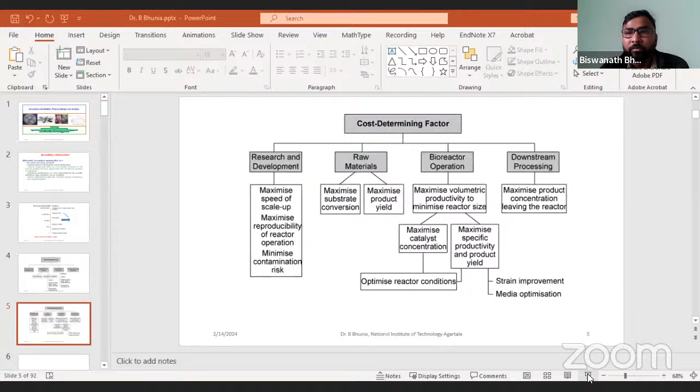So in our previous discussion, before the interruption, we discussed that there are two different aspects: one is downstream processing, another is the biochemical reaction. Downstream processing I already discussed - it is a unit operation not related to any biochemical reaction. But bioreactor operation is very important when you are designing any secondary metabolite process.

Here you need to think about several things - not only how you design a reactor or a process, but how you can improve a strain or optimize the media. As a whole, you have to think about the process. It is not simply batch process, fed-batch process, or what you are adding. It is the whole concern - from reactor design, to strain improvement, to media optimisation - that constitutes bioreactor operation.

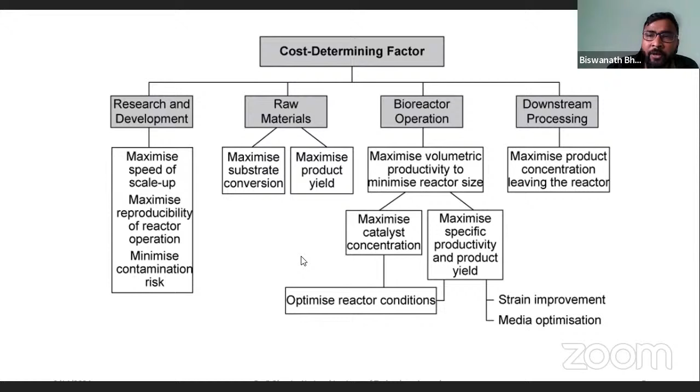Everybody might know that various kinds of bioreactors exist, and bioreactors are usually operated in different modes. The usual reactor used is the stir tank reactor, a batch reactor, which operates under batch conditions and unsteady state conditions - meaning there is no input and no output. Once operation starts, if you think about production of secondary metabolites or primary metabolites, your reactor will either be operated in batch mode or flow mode - there are two kinds of operation process.

But when designing a reactor, there are two things to keep in mind. One is that mass should be uniformly distributed throughout the system. This is the main constraint, and normally this does not happen in real reactors, only in ideal reactors. When designing a reactor, we assume our reactor is ideal, with no heterogeneity in mass distribution, mass transfer, heat transfer, or other concerns - we assume all parameters are uniformly distributed. Practically, this does not happen, whatever it may be.

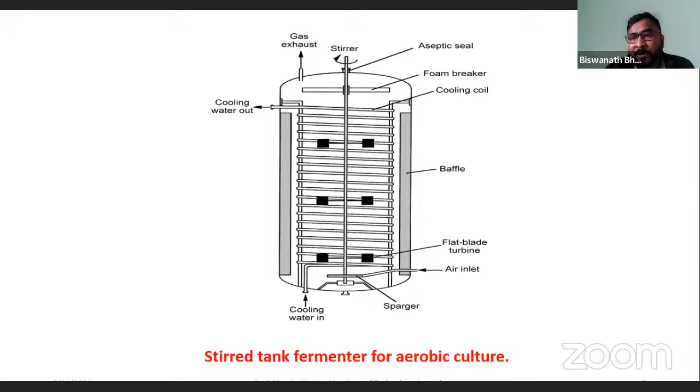Other basic things include temperature and pH requirements. One pH probe is there that maintains how much pH is required. Although such requirements are not so much needed for chemical reactors, for biochemical reactors it is mandatory and should be properly sterilized. This is one beautiful example picture I've shown you—that is the stirred tank batch reactor.

Now, if your design process requires a lot of oxygen, but your strain is not able to tolerate the damage due to the impellers, there can be some problems. That means you need more retention of the bubbles inside the system, which means the height of the reactor should be very high, because bubbles sparge at the bottom and slowly move to the top. So if you want to increase the residence time of the bubbles, the height of the reactor should be high.

So height should be more than the diameter. That is the first point. Second, some cells, basically animal cells, cannot tolerate the impeller you are using because huge damage happens. In that case you can avoid this impeller. But at the same time, you need mixing also. So there can be very poor mixing, but mixing is still possible.

So what is required for animal cells? But here is the problem. When you are sparging the air, in the bottom the density of this liquid will be low and the upper density will be high. So the low density liquid will go up and the high density liquid will come down. So there is a chaos, and now local mixing takes place. There is no uniform mixing.

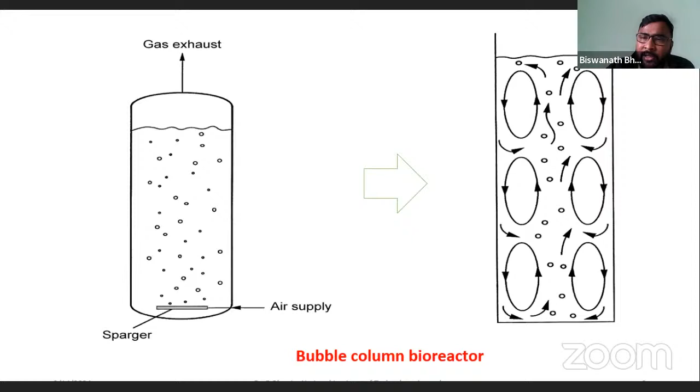For that, this is called the bubble column reactor. Then we can slightly differ the design into the air-lift reactor. Here the configuration is totally different. You see there is an input in this region only. So low dense liquid goes up and high dense liquid goes down, with two entry points. That design also you can use for animal cell cultures.

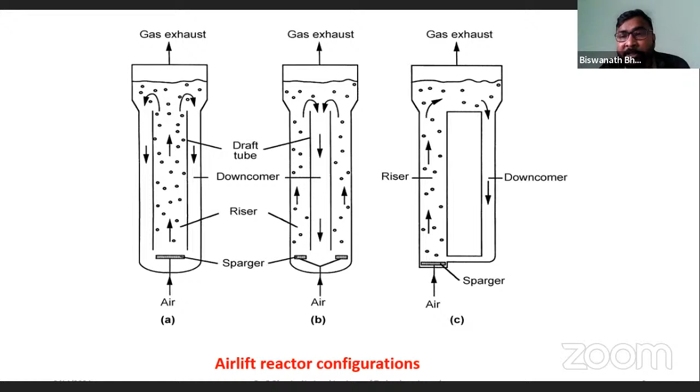The advantage here is the electricity cost is saved because your impeller is not there. If an impeller is required and moved every time, you need to spend on that cost. But here your cost will be minimized, though you have to compromise on mixing, because in the stir tank reactor with an impeller, mixing is very proper, but here mixing will not be as good. Now we can discuss another kind of reactor, the packed bed reactor.

The packed bed reactor is basically used for long-term use. In a stir tank reactor, after completing your experiment, you have to discard everything. But in a packed bed reactor, you can reuse the beads repeated times, which minimizes cost also. But this involves heterogeneous reactions, not homogeneous reactions. Heterogeneous reactions mean mass needs to be transferred from the media to inside the catalyst, so there will be mass transfer limitation problems. So the design criteria is a little different from the previous reactors we discussed.

Now understand that two phases happen here. One is the solid phase where your catalysts are held - that catalyst may be cells or enzymes - and your media is the liquid phase. These are two different phases, so concentration gradients happen, and that limits mass transfer. If your catalyst is very strong but mass transfer is not happening properly, then your end product formation will be very less. This is one step I've taken towards the fluidized bed reactor, which follows the packed bed reactor.

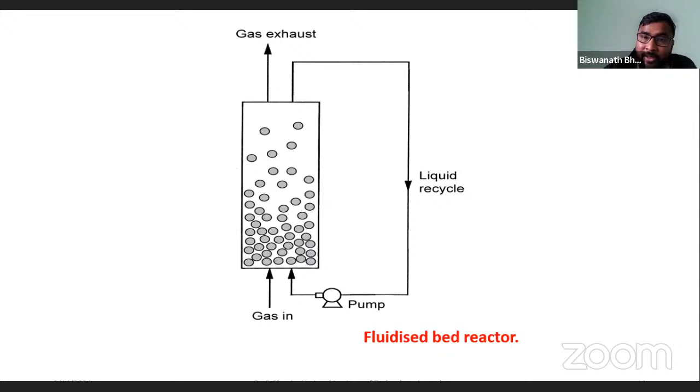Next, we are going to design as a whole that process, indicating the reactor designs as well as the reaction engineering considerations when you are going to design any secondary metabolites.

Let us have a short discussion on batch cultivations, because we have already discussed the batch cultivation process, what we have to do, since there is no input and no output once the reaction is started.

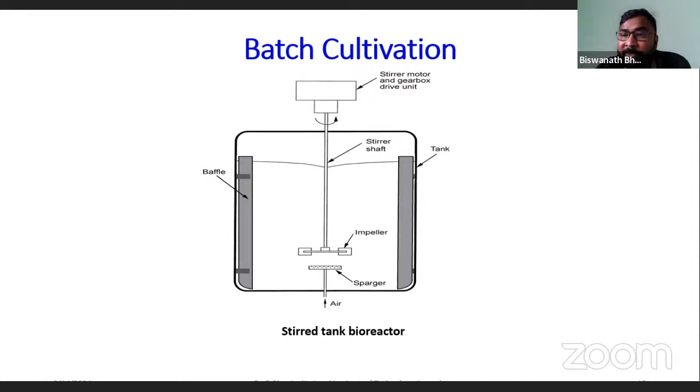But here the main problem is that your mixing needs to be effective. But what you think should happen normally doesn't happen, because how good your skill is to design the impellers will tell you how effective it can be for mixing inside your reactors.

Now, there are different kinds of impellers, and their flow movement process is different. Various kinds of impellers are there, and they can be designed based on your requirements. This is one rotational part.

If you see, there is a circular motion of the rotors, which basically looks like a fan. If you put a fan inside this reactor, your liquid will have rotational movement inside the reactor, but it is not uniform mixing inside the system.

So that basically creates vortexing inside the reactor. That means if you design a reactor with impellers, vortexing happens due to the rotational mixing of the impeller's rotation. So that is not desired when you are designing a reactor.

So that's why you have to use baffles. As I told you two to three slides before, regarding the utility of baffles — baffles basically help to remove this vortexing, and it is a regular phenomenon.

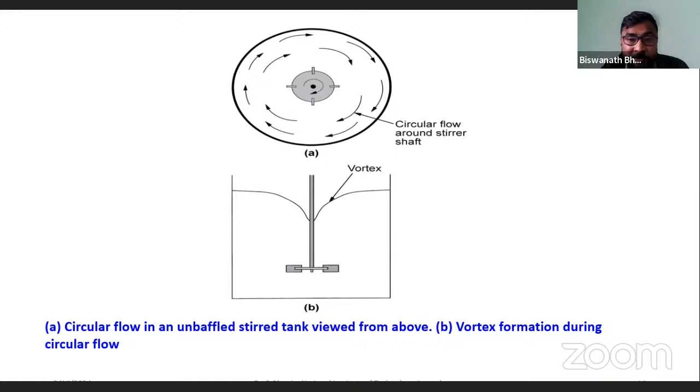So at a small scale, you may not face that problem. But at a large scale, when you are designing at scale, you have to take care, because vortexing might disturb your overall process. So in that concern, you need to think about baffles too.

Now, another flow pattern of the impellers: this is a radial motion of the fluids. When the impeller moves, the liquid flows in both directions — left and right — but at a 90-degree angle with the impeller shaft.

Once the liquid touches the walls, it is divided into two directions. One direction goes up and helps mixing in the upper region, and the second portion goes to the lower region of the impeller. So there are two things happening.

This part is called the impeller clearance. The impeller is able to mix in that region, which is called the clearance of the impeller.

Now, how many impellers you need depends on the height of your reactor. The usual thumb rule is that the impeller diameter is one-third of the tank diameter, and the clearance is one-third of the height of the reactor. But this depends — it is not a strict rule, it may change depending on your requirement.

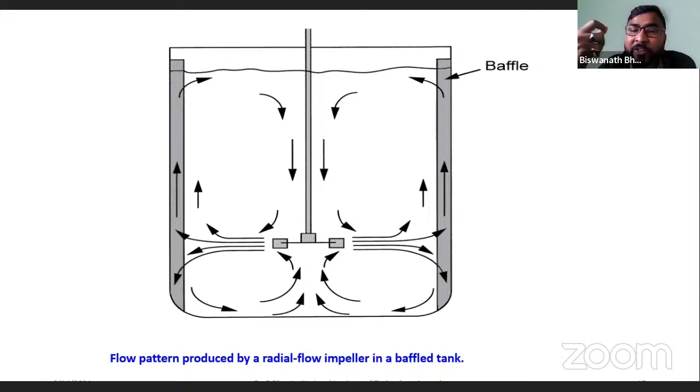Now, another type is the axial impeller. Here is the previous impeller, and here is another type of flow regime where the impellers rotate, but the liquid pumping efficiency is different. The direction is different — you can see the axial direction here is not at 90 degrees to the impeller shaft.

So here the mixing as a whole happens in the axial direction, but the ideal condition we are looking for doesn't always happen practically. That's why sometimes there is a dead volume, which affects the process when what you expect doesn't happen due to the dead volumes.

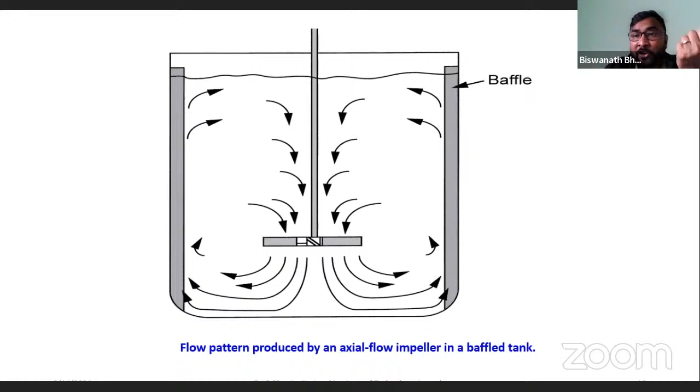If your dead volume is very high and your impeller clearance is not good, then your product yield will not be as expected. Now, you can see there are various kinds of impellers, but how will I choose an impeller, and which impeller is good and which is bad?

There is no thumb rule that this is good or this is bad, but you have to think about your requirements, what you need basically, what is your requirement.

The first one is the 6-flat-blade disc turbine. This is the most common impeller used in the microbial fermentation process. If you are looking for secondary metabolites from microbes, definitely this impeller you will see in the reactor. But the problem is when this turbine moves in rotation, particularly in its direction.

Once bacteria hit these walls, damage of the cells happens. You cannot say that damage will not happen. So we need to think about this, and coming later.

This is the propeller, which is basically rotational motion, and pitch blade turbines. And this is the anchor, which depends on the viscosity of the media. You have to choose your impellers accordingly.

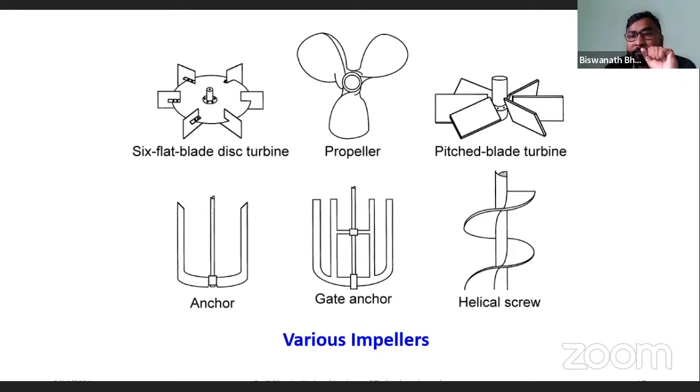Here I have shown you the impeller types versus viscosity. If your viscosity is in the 10^4 range, you can use propellers or flat blade turbines. In most microbial fermentation processes, including some fungal fermentations, there's a bit of a problem, but up to the 10^4 range our fermentation broth viscosities typically stay. That's why we always prefer to use turbine types, flat blade turbines or Rushton type turbines, in the reactors. So these are the scales for what viscosity your system has and which kind of impeller you can use.

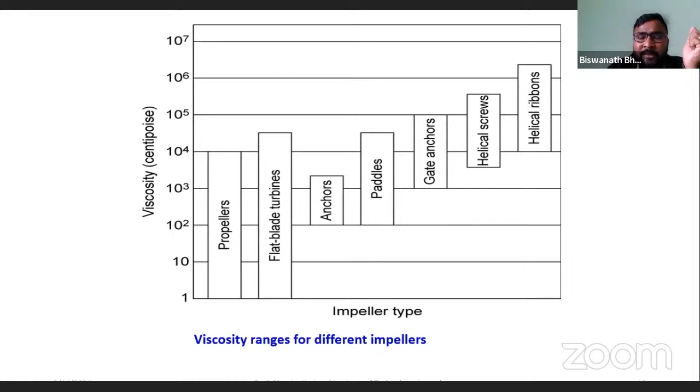Now there are two different designs I have shown you: one is the 6-blade flat turbine, and the other is the Rushton type turbine. You can see the designs of the two different impellers. If you think, why should I use Rushton instead of a regular turbine, since both are radial flow impellers that help with mixing? The reason is that your electrical cost is very high for turbines compared to Rushton. That is an important thing here.

Look at the designs. When the blade is flat and moves, the bacteria hit the walls directly, causing damage. But if it's curved, the bacteria will not hit the wall directly, they basically just kiss the wall, so there is less damage. So if you think your bacteria is very sensitive, you have to consider the Rushton type turbine.

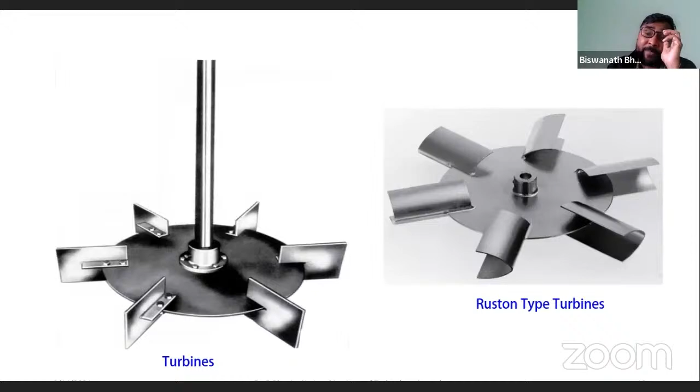So everywhere you can change your design, and that is the beauty of engineering science. Whatever your requirement is, you can shift your design accordingly. Rushton type turbines have advantages already mentioned, but the cost is very high, meaning the electrical requirement for a particular RPM is high.

Another problem: even if you choose the right impeller, what will be the relation between the impeller speed and the air flow rate? This is very important and you have to correlate it when designing any production process. Let's say there are basically three conditions that happen with your impeller.

Sometimes you give the RPM, but your impeller is not moving, because that is called the flooding condition. The impeller is not moving because air bubbles have blanketed it, so even when it is on, it cannot move. This is called the flooding region.

Now if you slowly increase the impeller speed, it will start to move. That is called the loading region. If you increase it more than that, then it's called the continuous mixing process.

So you have to think about how much oxygen is required, what flow rate you should decide, what the retention time will be, and what the RPM should be. As a whole: first is the flooding case, where the impeller is totally interrupted, blanketed by air bubbles; then the air bubbles are slowly thrown off by the impeller; and finally there is complete mixing by the impeller. You have to take care of this when designing reactors or processes.

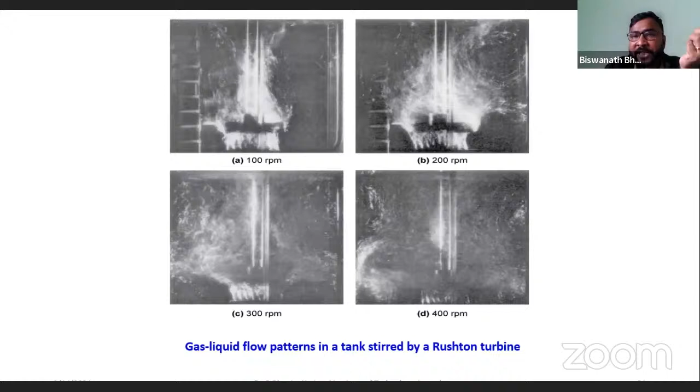Now, this is one where gas cavitation happens, so your impeller is not moving properly. This is normally called the cavitation process, where your pump is totally blanketed by air, so at that time you have to give the water. Here also, same thing - your impeller pump, when it is blanketed by air bubbles, because in your system is the aeration process, you need the oxygen, you need the air. Without air your cells cannot survive, so you have to give the air, but there is a limitation again. So how much RPM you have to fix, that also needs to be taken care of.

So design means as a whole, you have to think about everything - not only are you giving something in the media and your product will come, but why it is not coming at large scale, that needs to be taken care of, which is the prime part of the design.

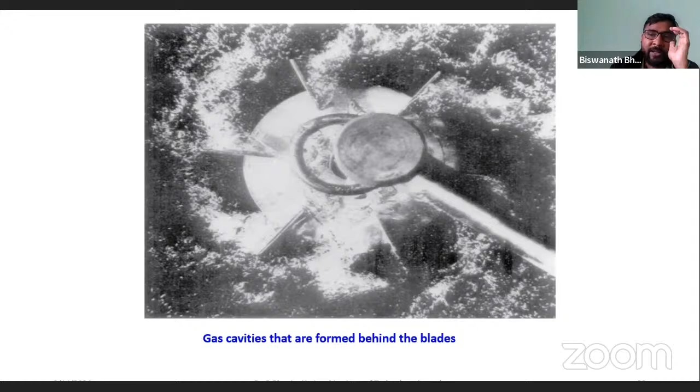Now, how do you check that you have designed everything properly - how do you check that your reactor is actually an ideal reactor or not, whether proper mixing happens or not, or how long is required for proper mixing? That also you have to test once you have started. Before that, you give a dye into the reactor, and you have to check how long is required for uniform concentration throughout the reactor.

This is a picture I've taken from the books, showing how the tracer concentration changes within the reactor. If it takes a long time, that means your mixing time required is more - so your impeller is not properly designed, your baffles are not properly designed, your reactor is not properly designed. Even if you optimize the media, even if you have selected a good strain, your output will be very less.

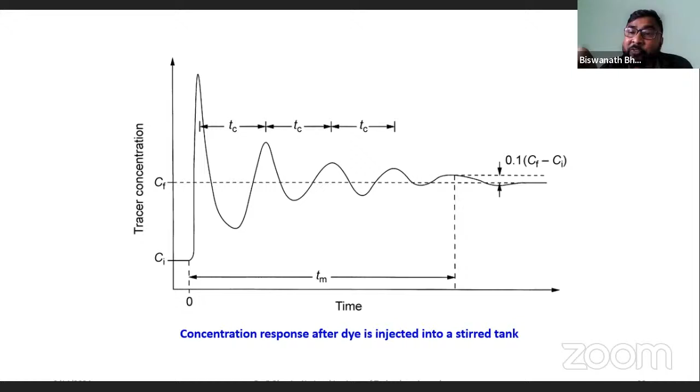Now, another part we always forget is that we never concentrate on the fluid's behavior, because reactions only happen if you have substrate, but your substrate will be taken care of by the fluid. Fluid is the carrier that will bring your substrate from one place to another. So we never discuss the fluid's behavior, but you have to know the fluid's behavior first, and this is very important. That can be understood by the Reynolds number.

But the Reynolds number when liquid is moving through a pipe, and when liquid is moving inside the reactor, both behaviors are not the same. So when liquid is moving inside the reactor, that is called the impeller Reynolds number, because the impeller helps move the liquid, and that Reynolds number definition is different from when liquid is passing through a pipe. That is completely different - here the turbulence range will be around 10 to the power of 4.

So here you can see that Ni is the tip speed - basically the RPM at which you are moving your impeller - and TM is the mixing time. You will see that in the turbulent region, the product of Ni and TM is constant. This is very important, because if you increase the Reynolds number, you will see the product of Ni and TM will be reduced drastically, up to the laminar region. But in the turbulent region, it is exactly the same.

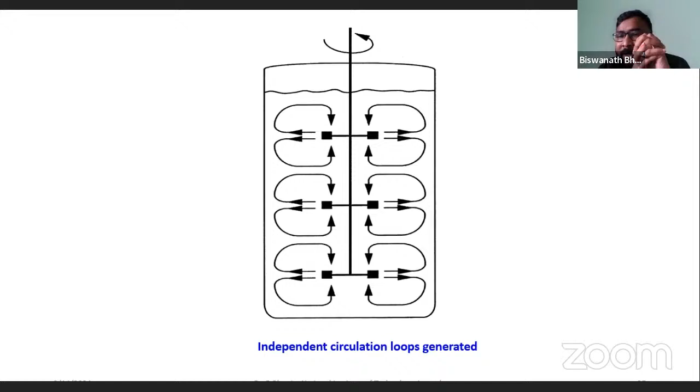Now, as I already discussed, the clearance of the impeller is very important. You cannot give one impeller for mixing throughout the entire reactor - it's not possible. That is the clearance, and clearance is 1/3 of the total height of the reactor. This is not exactly equal for all impellers - basically we are talking about Rushton type turbines, which are normally used for bacterial or fungal fermentations, where clearance is 1/3 of the height of the impeller placement.

Now, another beauty of these pictures - if you see multiple impellers, you will see the mixing time requirements in the middle regions are less, because in that region your mixing time will be less. But on the wall side, your mixing time will be very high, because the wall side gets more hindrance due to viscosity. But in the center, your force is very high, which can overcome the viscosity, so the time requirement is very less. So you have to properly think about what will be the exact RPM required so that uniform mixing can take place. Without mixing, your reactor is not properly designed.

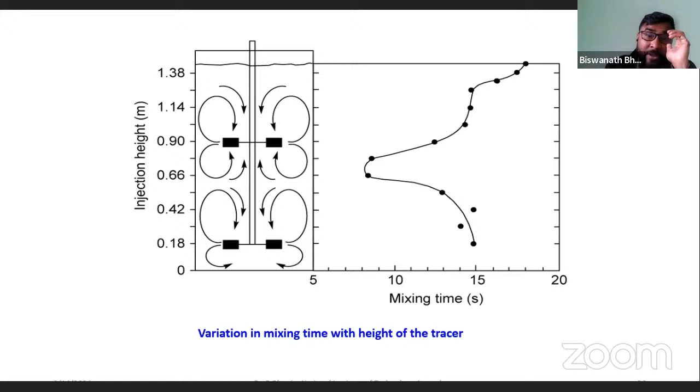Now, that is one example I would like to share, because when animal cells are cultured in microcarrier systems, your animal cells get disrupted. Till now, whatever we discussed was about microbial cells, but animal cells are very sophisticated, and they are not so robust that they can tolerate bacterial-like conditions.

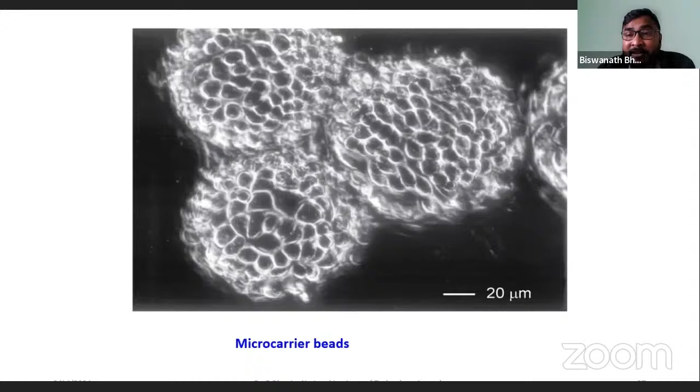So sometimes whatever impeller you are using may create hindrance and damage the cells, which cannot be tolerated by animal cells, unlike microbial cells. So either you have to remove the impellers. Once you remove the impeller, it's okay, but then oxygen requirement will be very less, and mixing will not be proper. So if you even start the mixing, you have to think about what the RPM should be.

If your design is not proper, there is a chance eddies will form. Eddies basically mean turbulence of the fluids inside the reactor. If your carrier size is small and the eddy diameter is big, then it is a little bit safer, because your microcarrier will move within this, and there will be less damage to the animal cells. But if your eddy size is very small compared to the microcarrier, then huge damage will take place, because the microcarrier will move in all directions and get force from all sides, which helps damage the animal cells.

So you also need to take care of what RPM and what type of impeller you use. This should be minimized, otherwise maximum cell damage will take place.

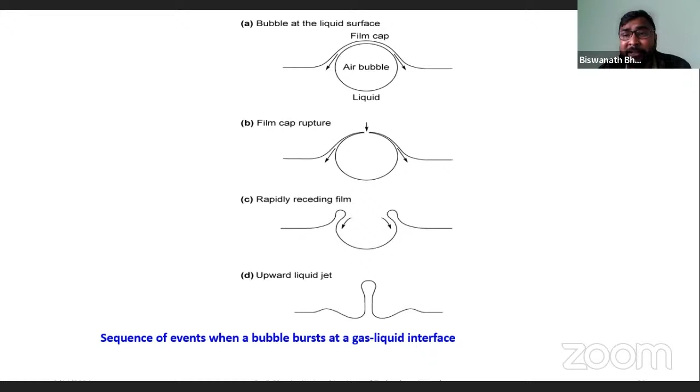Now, after all this, if it is well run and you have totally minimized the error due to mixing, that's fine. Then you have to think about the mass transfer problems. So what is the mass transfer problem here?

Most people know that oxygen has sparing solubility. Sparing solubility means around 6 to 8 milligrams per liter of oxygen can be dissolved in water. And if your cell requirement is very high, then how can that oxygen be transferred from the air bubbles to the liquid to bacteria, or air bubbles to liquid to fungi?

So there are three different phases here. The bubble is the gas phase, the liquid water is the liquid phase, and your bacteria or fungi is the solid phase. So there is a problem.

Everywhere there are boundary layers, everywhere there is resistance, and everything must be taken care of, because in heterogeneous reactions the output will always be less. In a heterogeneous system, mass is transferred from the air bubbles to the liquid, so the concentration will be reduced. That means if initially you assume 6 to 8 milligrams per liter of oxygen is there, once it comes to the water, it will be reduced. Then from water to bacteria, there is again a liquid-solid mass transfer ratio.

So that will be reduced. If your oxygen requirement is very high, then air sparging alone may not be sufficient. Then you have to add additional oxygen. That needs to be supplied, because otherwise it really creates a catastrophe for the cells. You will find that everything has been given, but your cells don't form the product.

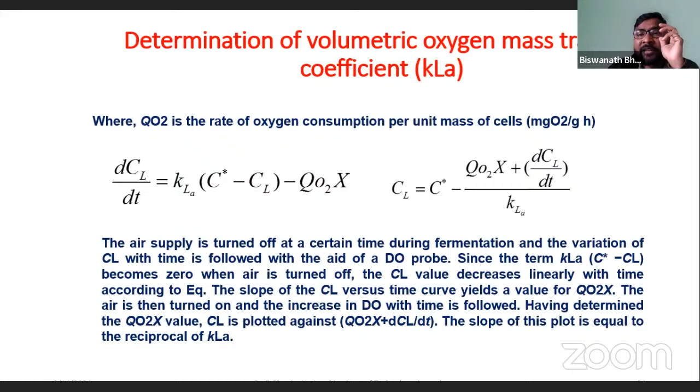So here there is some expression and how you can calculate it is given, but it's not that important. Now I'm just going to discuss the mathematical expressions.

How can you design it? Basically, what does design mean? If you are talking about mass transfer, if you minimize all the other things, then design means, in the reaction engineering perspective, for a batch reactor, the time - how long it requires for particular products. Basically, that is the engineering language - how long it takes to get a certain amount of product.

Here is a very clean system. Input minus output plus generation equals accumulation. So in your reactor, whether it's a batch reactor or a flow reactor, whatever it may be, there is a very common equation: input minus output plus generation equals accumulation.

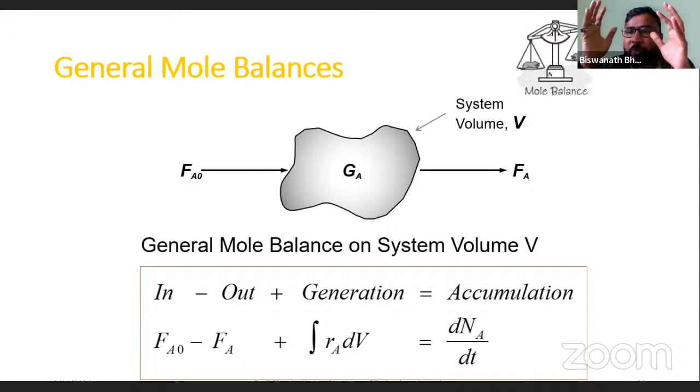So already I told you that in a batch reactor there is no input, no output. So it will be zero, but generation is there. If your product is formed from the substrate, then definitely it's a generation. If you are calculating the products, then definitely it's a positive generation. If you are calculating the substrate, then it is negative generation, because your substrate is not generated - it is consumed. Bacteria consume your substrate, and your product is formed.

So what assumption you are taking during the calculation is very important. But after all, design of the batch reactor means you are only finding the time for completion of the process to achieve a certain amount of product - what you are expecting or calculating from the system. So if you think that amount can be produced, you cannot go beyond that.

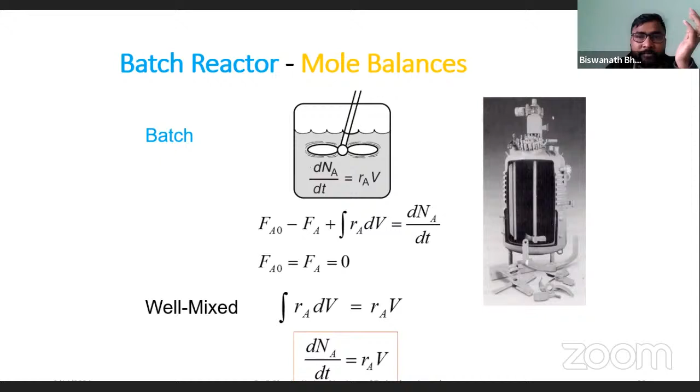Now for batch reactors, basically I told you that time is important, and NA0 is the initial concentration of your substrate, and NA is the final concentration of your substrate. So that is simply the derivation, and the mathematical compulsion is here.

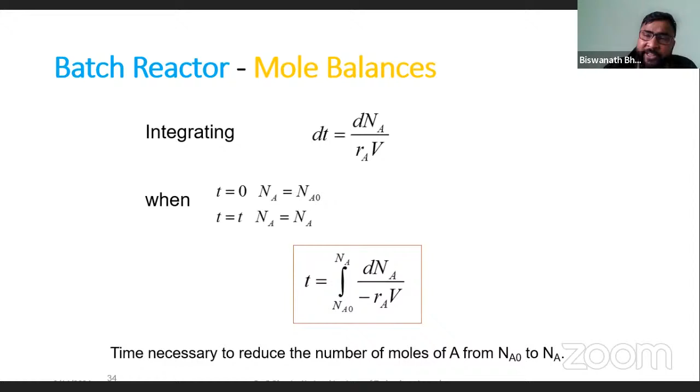So you have to design it - if design means some mathematical part, that also should be taken care of when you are designing. Basically, what happens is your substrate is going to reduce. So substrate is reducing with time, because there is no input, no output in the batch process. Whatever work you do in the conical flask, that is also a batch reactor.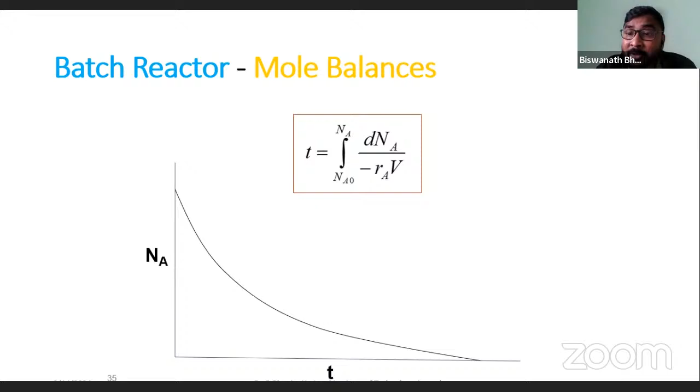But here also, once you have started your experiments, you cannot stop it. Once you stop, that means your process is over. So that is one kind of batch reactor.

Now another is a fed batch process. For secondary metabolites production, fed batch process is very important. When penicillin G came to market, people had tried a lot with the batch process, but it is basically from fungi, and fungi handling is very difficult. If you give fungi food, it will consume it and grow fast. Then at the stationary phase, when there is a shortage of substrate, it will start to produce antibiotics, basically penicillin, but it's not sufficient.

That's not what you were expecting. Then people thought, why can't we always give a threat to the bacteria or fungi so that they continuously produce the secondary metabolites? That is the beauty of the fed-batch process.

Here we are not giving all the food at the initial level. We give the food at certain time intervals so that the bacteria or microorganism always feel the threat of a shortage of food. Another point is that the initial volume of liquid will change over time, but the concentration never changes. That's why volume will always increase, but your concentration will not change.

That is the main thing about the fed-batch process, and that's why it is neither a batch process nor a continuous flow process—it is a quasi steady state process. This is what you take care of when designing a fed-batch process. You should keep in mind that as the volume increases, dilution is happening. The specific growth rate of the bacteria should be equal to the dilution of the system, that is F by V.

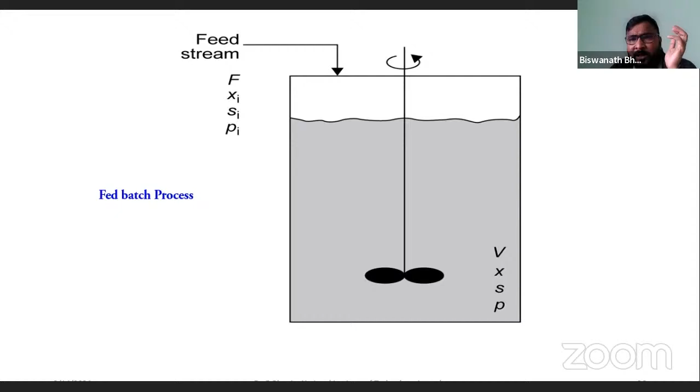Now another part is the continuous stirred tank reactor. When you design this, I'm just going to touch on a single reactor, because reactors might be in series. In that case, there are designing constants and designing criteria, but we are not going to discuss those details.

Here, only considering the continuous flow stirred tank reactor: there is always input and always output. You know that a continuous stirred tank reactor basically operates at a lower concentration of substrate. So if you want a high concentration, go for the batch process. As per your requirement and convenience, you can use the reactors.

But here it works under steady state, because you are always giving input and always getting output. So the concentration of the reactant inside the reactor always remains the same, and that is the beauty of flow reactors. But in a batch reactor, your concentration will always reduce, meaning your rate of reaction is always reducing. So what happens to the rate of reaction at the beginning in the batch process? It will slowly reduce, and basically it follows Monod kinetics.

Monod kinetics, for the growth of bacteria, is very famous, but it depends on the substrate concentration initially—after that it's not dependent, because if your substrate concentration is very high. But the beauty of the continuous flow reactor is that the rate of reaction, or mu, the specific growth rate, always remains constant, and that should be equal to D.

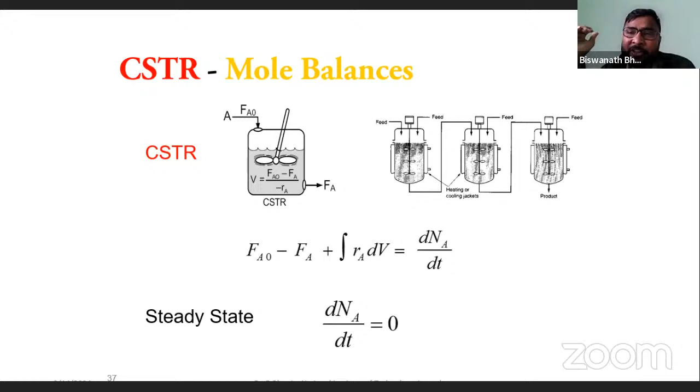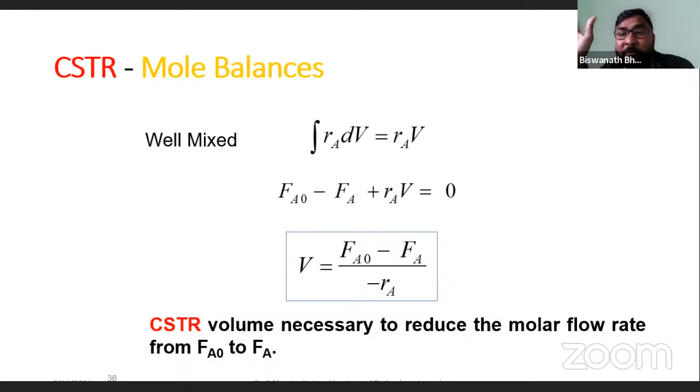But one problem is here: if you somehow do not calculate the mu, the specific growth rate of the system, you don't know it, and you keep increasing your dilution, what will happen? There will be no bacteria inside the system. You know bacteria is there, but exactly bacteria is not there—it's a completely washout process. So it is a failure of the design of the continuous flow stirred tank reactor.

So here we give examples up to certain regions you have to wait, because if you suddenly go beyond that and your dilution is suddenly increased, what will happen to your microorganism? The microorganism will suddenly disappear from the system. It is called the washout point. You should take care of that—the dilution should not be greater than mu.

It should be always equal. Then you will get the yield. So that's the beauty of the continuous flow stirred reactor.

Another part is the plug flow reactor. What I have told about the plug flow reactor, this is not basically used for biochemical systems, mainly for the sterilization process we use it.

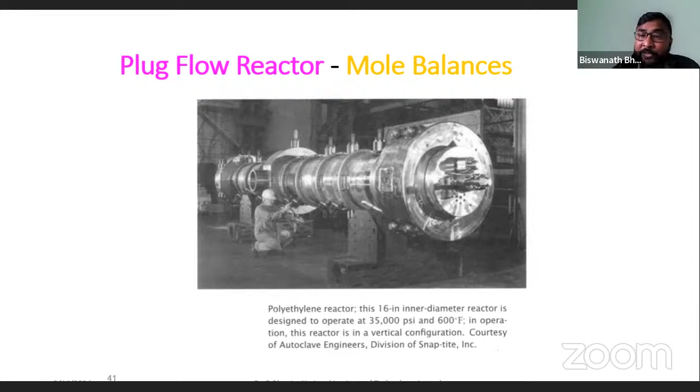But it is not so important for biochemical systems, used more for chemical systems. The only beauty is that in the radial direction, your concentration will maintain steadiness, and it should operate under plug flow. Fluid velocity should be in the plug flow region, so Reynolds number plays a major role here. If the fluid velocity is very low, it will not behave as a plug flow reactor. So that also needs to be taken care of when designing a plug flow reactor, but it's not so important. Only in the sterilization process it is used.

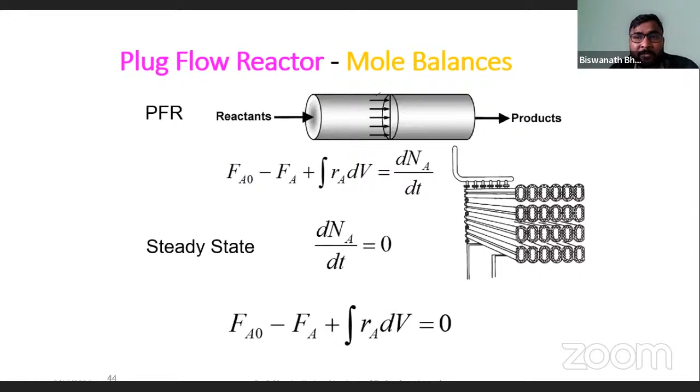Now another is the packed bed reactor, which is used in most cases in the biochemical field because we immobilize our catalyst inside the beads, and in some cases when we need continuous product. In the batch process you will not get continuous product, but in the packed bed you will get continuous product. But the disadvantage here is it works under heterogeneous systems.

That means there are two different phases. A solid phase is there. So the problem here is different from the batch process. The batch reactor has its own problems, which are not the same as the packed bed reactor's problems. Batch reactor problem is that the substrate concentration is reduced, while the packed bed reactor problem is mass transfer limitation.

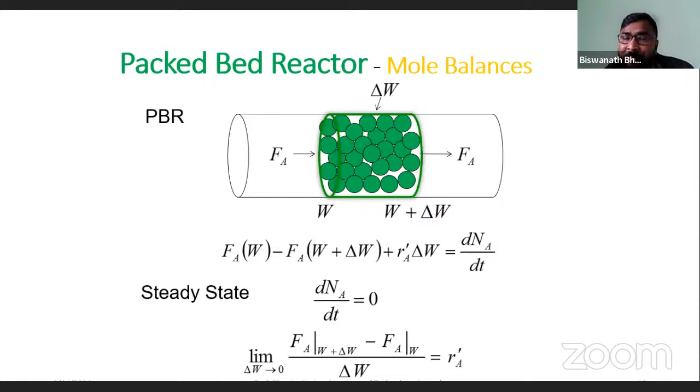So definitely the packed bed has an advantage if your catalyst or enzyme is very costly, since you cannot spend it after one use and throw it away. So you have to immobilize it within the system and then place it into the system, and go for the conversion or any particular biochemical reaction. So the packed bed reactor is definitely a good system.

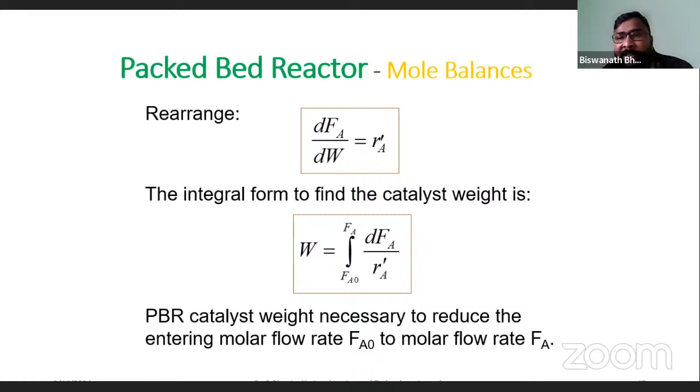So here the design is a little bit different. For the flow reactor, our intention is to find out the volume, but for the packed bed reactor, our intention is to find out the weight of the catalyst. That should be taken care of when you are designing a packed bed reactor. Here the volume is not the material; here the weight of the catalyst is the material that needs to be taken care of.

Now, as I always say, once the design confirmation is done, you are supposed to move to the systems and then take care of the analytical parts, to check whatever you are expecting is actually happening or not. That also we need to verify.

Hello, am I audible? No, still not. Yes sir, you're audible. Okay.

So the topics I have decided are design and analysis. The analysis part is also important because without analysis, you cannot say that your design is perfect and that whatever you have designed is perfectly done.

So I told sometimes... I'm getting some disturbance, might be. Yes sir, hello. Participants, please don't talk.

So that is the Monod model that I discussed sometime before. You know that the Michaelis-Menten equation is for enzyme kinetics, and the Monod model is used for cell growth kinetics.

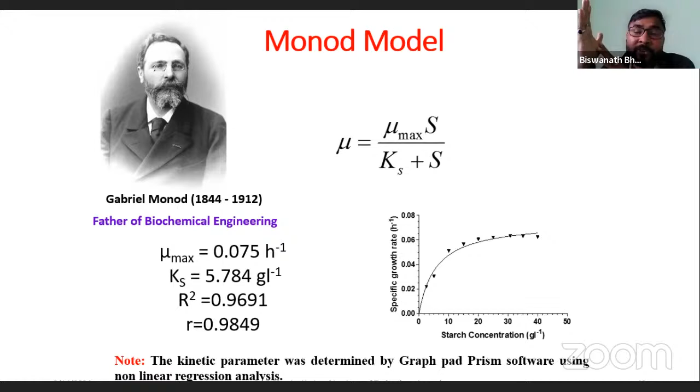Here you have to take care that the K value is very important when you are choosing any particular substrate for particular reactions.

Now, if it is not properly fitted with the Monod model, because Monod gave this equation quite a while before, but nowadays people are using several models. If your substrate is a little bit inhibitory at a higher concentration, because osmotic environment can also be a problem for bacterial growth in the system, there are lots of kinetic models out there. You have to fit your model, change it to see what kind of model it is properly fitted to, and then take this rate constant value for the designing of the reactors.

So this is one example. We have shown how these models are properly fitted, and both models, Aiba and Andrew, are approximately well fitted with the data from one of our students' experiments.

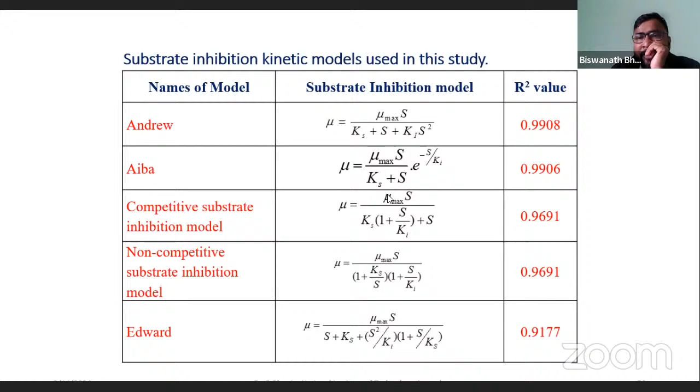Now, that is part of the growth kinetics of the cells. But if you go for the substrate utilization kinetics, that means at which rate your substrate is consumed and where it is invested, you also need to take care, because simply giving the substrate and getting the product directly from substrate to product is one case. But if your product is a secondary metabolite, that means your substrate is taken as food for their growth, and the product will form separately.

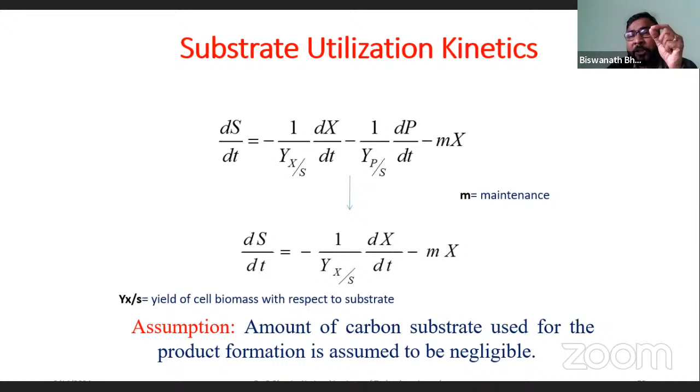So that is a secondary metabolite. Then that second term will not come into the picture - the first part is your growth associated term, where substrate is invested for growth, and another part where substrate is invested for product. If it's a secondary metabolite, your substrate is not invested for the product, and M stands for maintenance, since when cell damage happens, maintenance is required. So as a whole, whatever substrate you have invested, if it is a secondary metabolite, only the second term will be removed, meaning your substrate is consumed due to bacterial growth and maintenance purposes only.

Now, another important part when you are designing is determining whether it is a primary metabolite or secondary metabolite, and how you distinguish where it is produced. Based only on that basis, sometimes you may face problems when designing a process.

Why am I telling you this? Because in 1959, Leudeking and Piret established a model. They stated that for any product, whether primary, secondary, or even complex in nature, it is not properly distinguished.

You have to calculate, analyze your systems, and plot between the specific growth rate and specific production rate. Then you will understand what it is. So you see this equation: nu, which is the specific production rate, is equal to alpha into specific growth rate plus beta.

Here, if you plot this, there are three kinds of things you can get. If your beta value is 0, then it is growth associated, it is a primary metabolite. If your alpha value is 0, then you can say it is a secondary metabolite. But if your alpha and beta both values are not zero, then there is a complex thing that happens in mixed growth associated products.

So either it looks like primary metabolite behavior, even in the log phase it can be generated, it can be produced. So that also needs to be taken care of when you are going to design any secondary metabolite or product process. So this is what you have to calculate here - what is the value of alpha and beta. Simply by plotting, you will get the data.

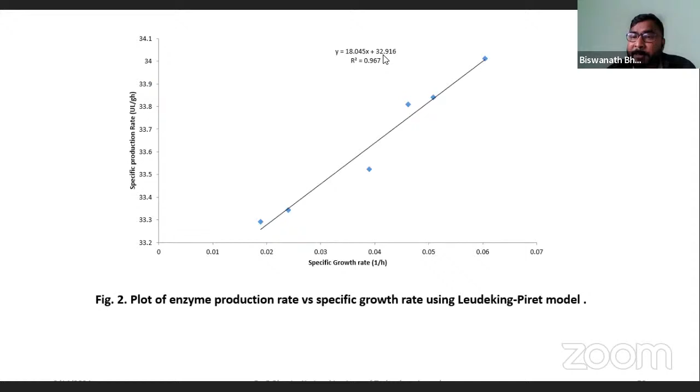Now, I told already that I will discuss secondary metabolites for the fungal systems, because the secondary metabolite here is the enzyme xylanase. One of my students did his PhD on that, and that part we are going to discuss here.

The fungi basically go through a spore phase, where germination tubes will form, and then if you give proper media and temperature, they will go to hyphae, then mycelium, and then they will give the product. So this is one thing I'm showing you here.

Every time your observation and analytical part should be very high to understand the systems if you properly analyze the process. So here I simply checked every day's interval what is the size of the spore, how it is going to increase, what is the time requirement, and what are the environment requirements.

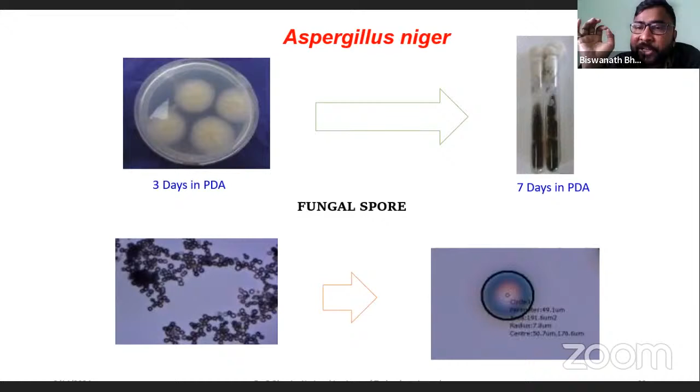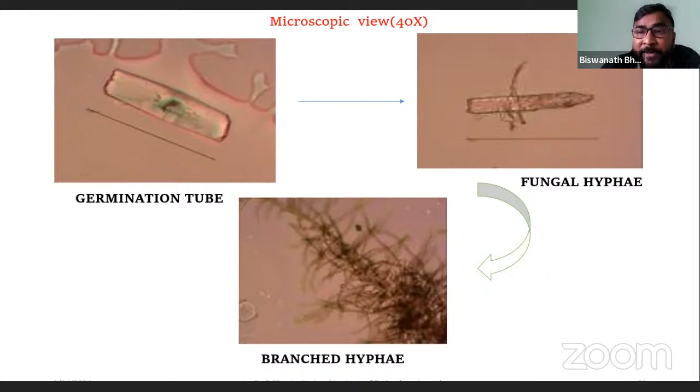So you see that from the spore, the germination tube is formed, and through the germination tube, the hyphae forms, and then the branch hyphae forms, which you can see under the microscope. Up to this you are able to control, but when mycelium formation takes place, then it's very difficult to control these things.

Now here, two things we need to take care of. Everybody optimizes the cultivation process, but I have optimized the spore age - actually, how long I need to keep it in the sporic conditions. After that, we can put it into the seed cultivation.

And how long we can preserve it inside the refrigerating systems, so that after that we can get better results. So that is also one part of the investigation here.

And seed cultivation - definitely, when you are developing any production process, you have to think about that seed cultivation, because we are going to minimize the lag phase or remove the lag phase completely. Seed cultivation is required, so that also needs to be optimized.

But how do we know that your seed cultivation process is finished? And second, how can you optimize a process for the enzyme products? So that part as a whole we studied in the fungal systems.

Let us check on a few issues, definitely about seed cultivation. Before that, we did some experiments on spore observations. What we got is that basically the spore age - the age of the culture from which the spore is obtained - that quality of the seed culture depends on the spore age.

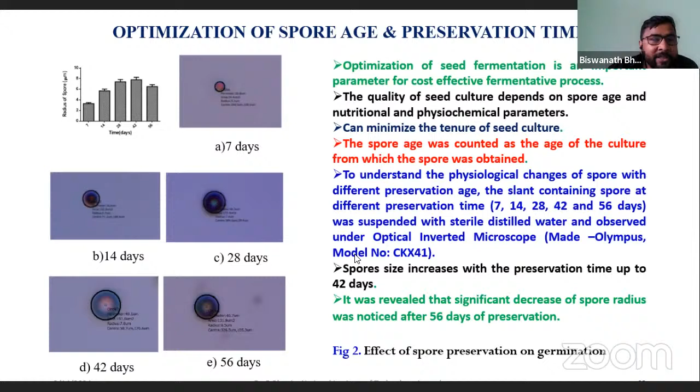Now if you go for the seed cultivation process, how do you know that your seed cultivation process is about to complete? Here we did one thing: when the pH reaches 6.2, that indicates your fungal seed cultivation process can be stopped. We first showed this in Aspergillus. If you look for the secondary metabolites, then seed cultivation should end at pH 6.2.

Otherwise you cannot control the seed cultivation process. As you can see in the red data, the length of the germination tubes in seed cultivation slightly increases, up to about 195 micrometers as the maximum. If you go beyond that, waiting more than 18 hours, you will face problems and will not be able to control these fungal systems.

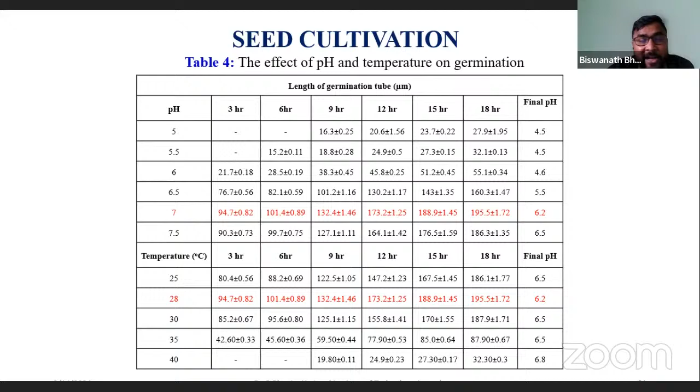So once the seed cultivation is done, then we go for the next step. A snapshot has been given here showing the temperatures and time requirements at various day and hour intervals. So at 18 hours, you will see the snapshot of these tubes.

After 3 hours, germination tubes will be formed, and then hyphae will form. Across various time intervals, what we concluded is that the hyphae alongside the germination tube was noticed at 28 degrees centigrade, around 196.8 micrometers, but you have to wait up to 18 hours.

Initially, when we start the experiment, we have to wait for 1 day, so we can minimize or intensify the process. If you initially wait for 42 days before starting the experiments, then the length achieved in seed cultivation will be less. If you keep samples in the freezer or refrigerator, you don't need to worry much about cost, but when you are actively cultivating the systems, you need huge manpower for another 12 hours and have to spend money as well.

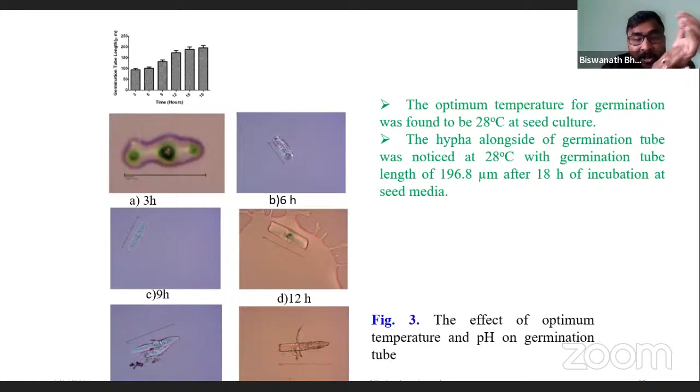So these are the things about the seed cultivation process that we have shown you. After that, we start to optimize the media.

We all know that nowadays there are lots of statistical tools for optimization, because one-way optimization is not accepted—there are lots of interactions between parameters. If you simply keep one parameter changing while others remain constant, that is not mathematically, statistically, or from an engineering point of view accepted. Nobody will believe your system is rational; it doesn't have any meaning.

So people use the many optimization tools available nowadays, like response surface methodology, Plackett-Burman design, and Taguchi methods. But our intention is not just that—we first need to screen the parameters, because not all parameters contribute equally to the production of any product.

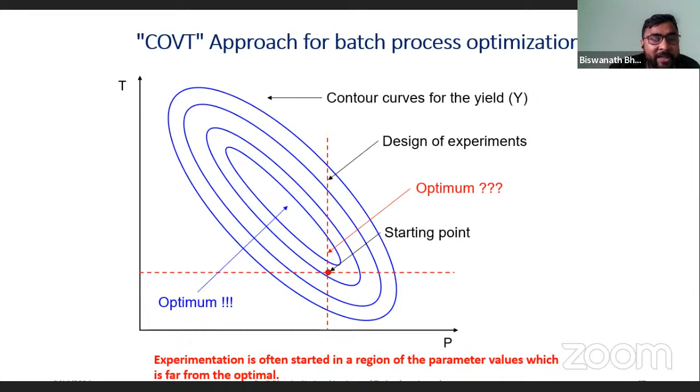So we need to first screen, and that's done by the Plackett-Burman design. Whatever your expected optimum is, it might be in different regions, so a one-factor-at-a-time approach may not be accepted. People always do the Plackett-Burman design first, especially when the number of parameters is very large, to screen them first.

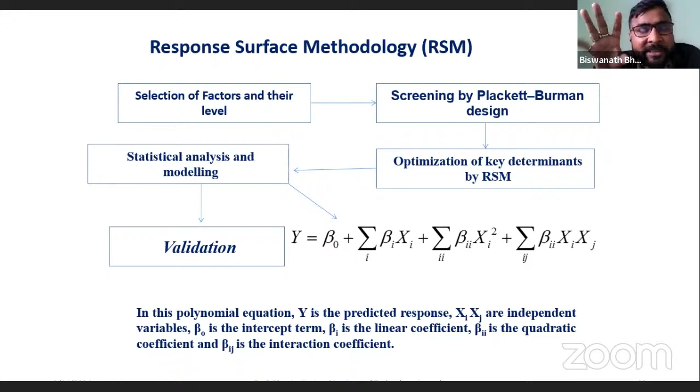After screening, you can go for response surface methodology. There are tools like CCD design or Box-Behnken designs you can prefer. Or if you think your number of parameters is very small and you need fewer experiments, you go for the Taguchi methodology, where the number of experiments will be less. But whatever method you use, it should be statistically significant.

So after optimization, you can go for designing the media. One beauty of the Taguchi method is that it works under the signal-to-noise ratio—meaning if your signal is high, you're getting good amounts of product, but if your error is very high, it is no longer accepted. So the system works under signal-to-noise considerations.

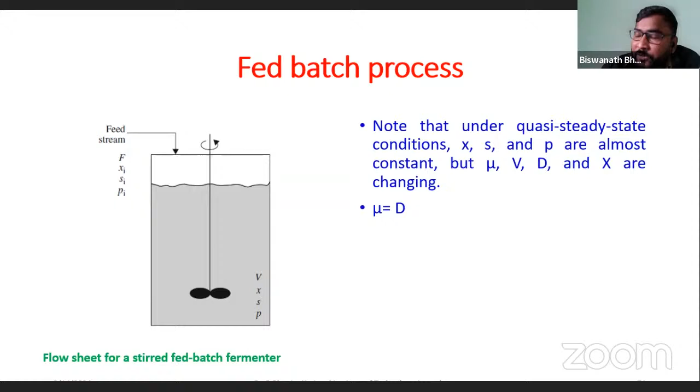I already told you that fed-batch process doesn't look like a batch process. Once you start it, you cannot add more, but here you can add any number of times. So what is your requirement? What is the design part? You should keep in mind only one thing: mu should not be greater than D, and D should not be greater than mu. We always keep in mind that mu, the specific growth rate of the system, should be equal to the dilution of the system. That needs to be taken care of.

On this part, once you start the fungi in the system, the fungi will start to multiply and huge multiplication happens. But at that stage, no fungi can produce enzymes. You can see that initially, up to 72 hours, there are no enzymes, because the germination tube, hyphae, or mycelia are not able to produce any secondary product.

That's why you need to give the fungi a shock. Either you cut the fungal mycelia into small pieces, and they can produce beads. Once you give the shock, the mycelia will transform into beads. I'm showing you some pictures of these beads here. Once they form from that region to the other region, only then will they start to produce the products.

You should take care of this, basically it is not required for the bacterial system, or even for the algae system, but for fungi you have to take care, and that's why people spend more time concentrating on this area. Designing only the reactor is not the only part; process design is also important, because without proper process design, even if you think you're designing a good reactor, you are not getting the product because your process is not properly designed. So if you think you're trying to produce the product from the fungal mycelia without proper design, your product yield will be very less.

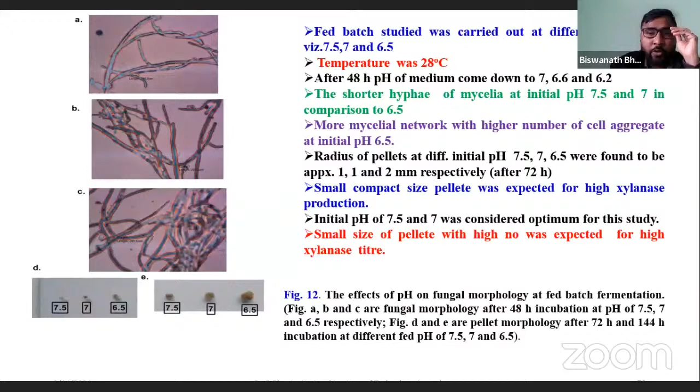So that is the thing.

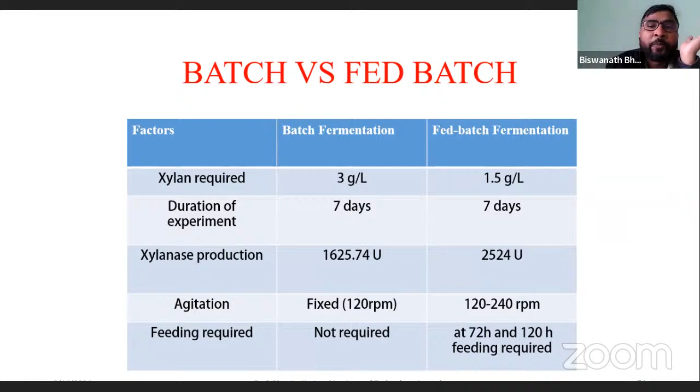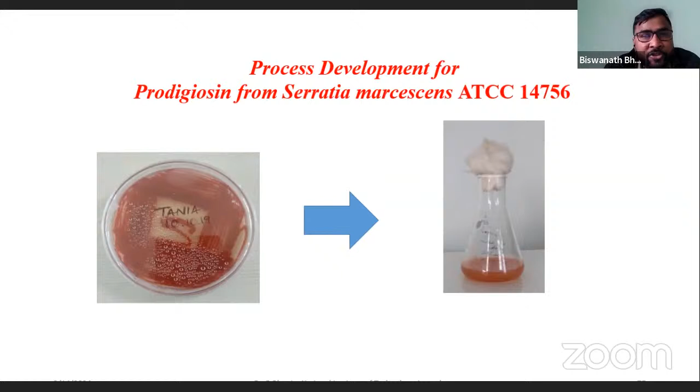Another process development we are doing for bacterial systems. I can show you how we design a process required for secondary metabolites like prodigiosin, a promising drug nowadays used for breast cancer. We developed the system here using Serratia marcescens, an ATCC system we purchased and used for production of prodigiosin. Normally we optimize these systems using one-way methods, but later we optimize using various sophisticated tools for process optimization.

Here we show it has peculiar characteristics. Whatever color you are getting, you will not always get it. We thought, why is this happening, because bacteria should give reproducible data. What we observed is that when it is in freezing conditions and once we transfer and plate it, that time it gives the colors. But the next day when culturing, we are not getting the red colors. It took a long time to understand that we were not giving the proper environment, which is why it wasn't giving proper colors.

Once you are streaking on the plates, basically there is food, so solid fermentation takes place. Until food is there, once you do a secondary transfer from here to another, they are not under threat since they have sufficient food. But under freezing conditions, the bacteria is under threat, the environment is not permitting, and food is not there. So when cultured in the primary transfer they give colors, but in the secondary transfer they will not.

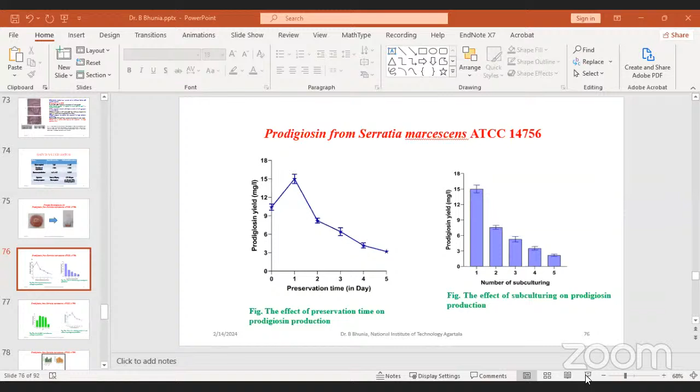Hello, sir. Hello, sir. Sorry, hello, give me allow to... Yes, yes, sir. Yes, sir, present the slide. So you are the host. Madam, extremely sorry, there is some net issue. No, what? You are the host, sir. Yes, yes, okay, you are the host.

So if you go for a number of subculturing processes, you will see they are not giving a good yield. So if you do multiple rounds of subculturing, your product yield is very low. Why does this happen? We studied this and found that once you go for subculturing, the bacteria always knows that next time it will also be subcultured with enough food, so it doesn't feel any stress. That's why the product yield is very low.

Next, we optimized the pH. It is known that for bacteria, a pH of 6 to 7 is good, and 7 is ideal. At pH 7, usually the production yield is very high.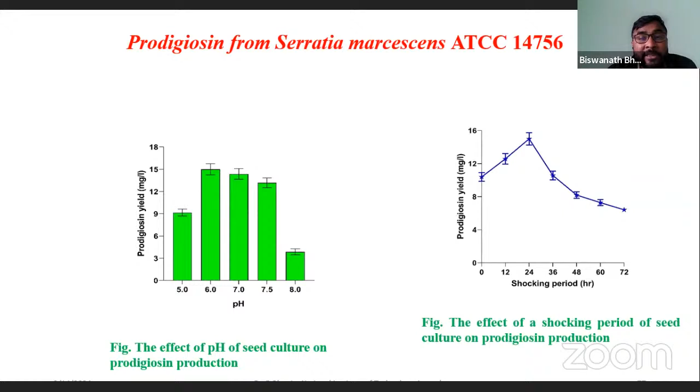Shocking period was another experiment we did - how long to give the shock, and how long to let it relax. We found that if you shock for 24 hours, then release, you get a good result. We did these experiments, although there is no clear-cut mechanism for why 24 hours is required; maybe from other studies it could be different. A lot of things need to be experimented with before reaching any conclusion.

Another part we tested initially was what type of environment and substrate conditions we need to provide to produce a good amount of product. We initially tried various Nutrient broth, then LB broth, then peptone glycerol broths. The result we got was that Nutrient broth is good, and 30 degrees centigrade is proper for getting good amounts of product. For the nitrogen source, we tested peptone, tryptone, ammonium phosphate, ammonium oxalate, and ammonium nitrate. Peptone was good, and peptone and tryptone were more or less similarly good.

For the sugar, if you go for glucose, fructose, or lactose - lactose is good. That is one important part we observed: lactose gives better results than glucose.

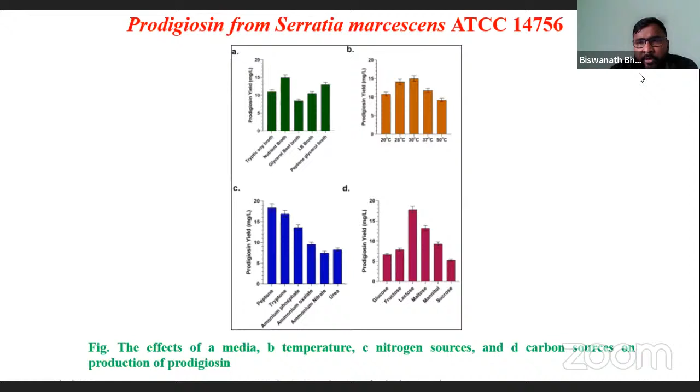Now, that simple optimization we did - we are not going to add sophisticated tools here. What we observed is that we can use powders, like sesame powder or peanut powder, purchased from the market, where raw material cost is very low. Can we use that, and if we use it, can productivity increase? We tested this. Definitely, we got good results with peanut powder along with Nutrient broth - we were able to get at least 33 milligrams per liter of product. Even in solid media, it gives the clear colors that are required.

Now we went for the cost-benefit analysis, because after all, you have to think about the product you produce in the laboratory scale, develop the technology, and then transfer this technology to the industrial scale. Scale-up criteria is very important because whatever process you develop needs to be transferred to industry. After fixing the scale-up criteria, you transfer the system, and then you have to understand the overall cost of the process. Let me go back to one part I missed - the scale-up criteria.

Scale-up criteria is basically done by 2 to 3 methods. One method is the Reynolds number - the impeller Reynolds number. Whatever impeller speed you use in the reactor, ND square rho by mu should be equal for the small reactor and the big reactor. So whatever speed you're thinking, say 180 rpm or 200 rpm, that needs to be maintained to get proper mixing - but it's not simply maintaining the same rpm. It's an equation you apply, and that ensures equivalence.

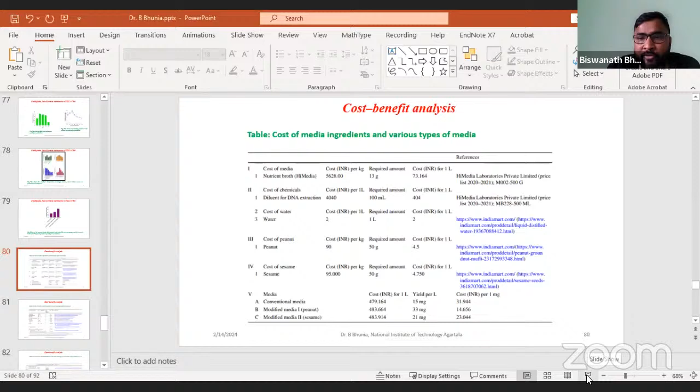All the cost you have to take into care. For this product it is 15 milligram per liter, and here we got 33 milligrams and 21 milligrams. If you convert into per milligram cost, that is 31 rupees, 14 rupees, and 23 rupees.

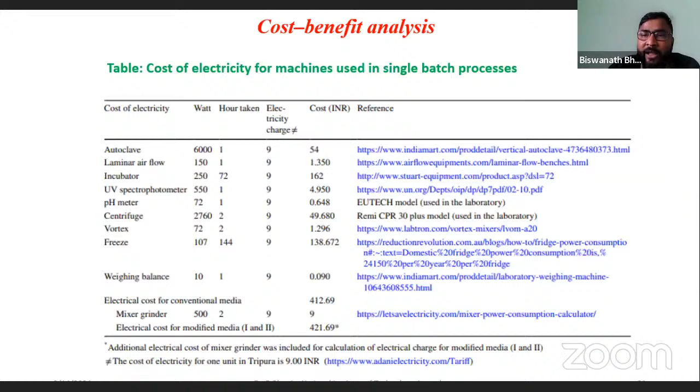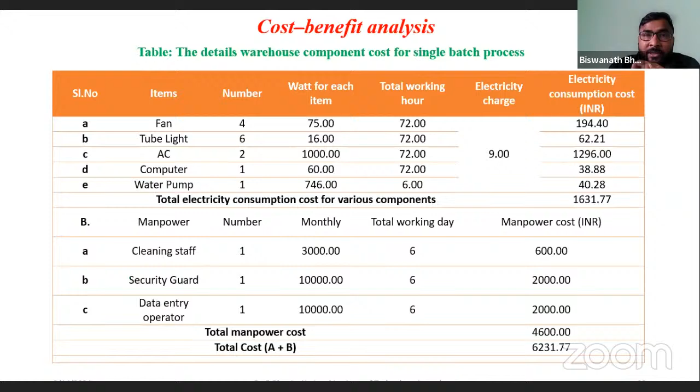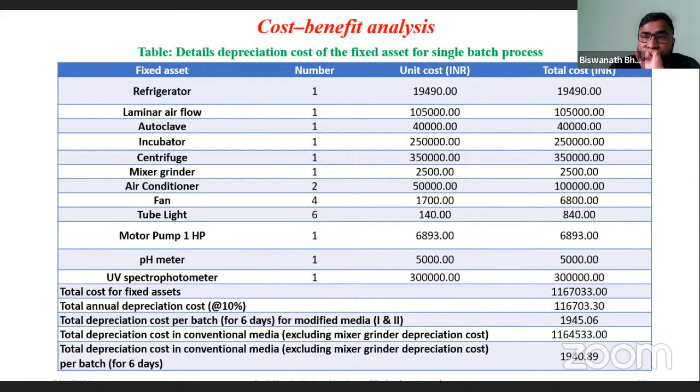As a whole, we are calculating the electricity cost for individual instruments based on how long they run, and that cost has been calculated based on reference values. Establishment cost and management cost have also been calculated, along with warehouse component cost, single batch process cost, and total depreciation cost.

Every instrument has a depreciation value; we have taken a standard 10% value into consideration. All parameters are taken into account: media consumable cost, cost of electricity, cost of establishment, and warehouse components. Downstream cost we take as around 65%.

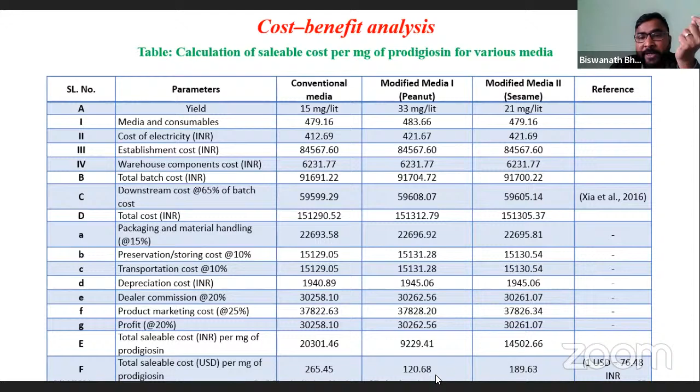Packaging and material handling is taken as 15%, and preservation cost, transport cost, all taken into consideration. After that, we calculated against conventional media. If you go for 1 milligram production, it costs about 265 dollars, but if you use peanut, the price is 120-125 dollars, which is the market price that Santa Cruz Biotech sells at. So we are showing where we stand compared to their cost.

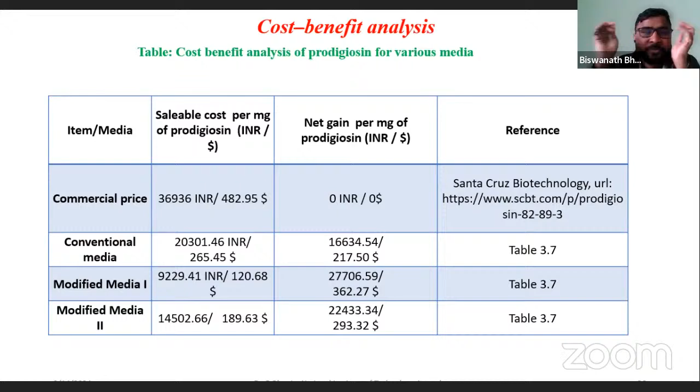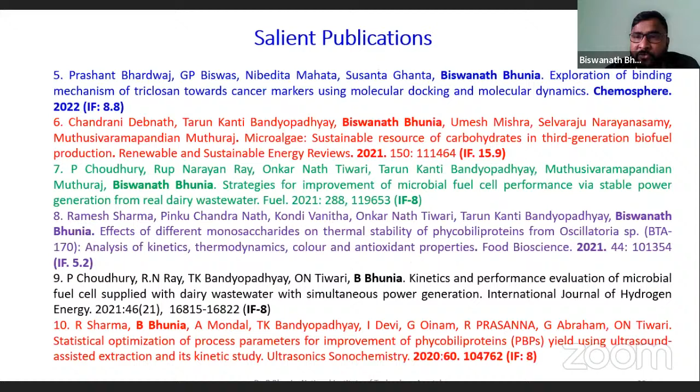Now, if you have any query, you can ask. Thank you, sir, it's very valuable, everything you have shared with us, sir.

So there are a few questions, sir. How can we use FBR for preparation of value-added products? The question from Miss Parameshwari: how can we use FBR, fluid bed reactor, for preparation of value-added products, for low cost production of secondary material at large scale?

FBR means fluidized bed reactor. Value-added products means we are not talking only about microbial products—value-added products means any product converted from a substrate, for example producing glucose from cellulose. Here the substrate is cellulose, the product is glucose, and the enzyme is cellulase. Cellulase will degrade the cellulose and produce glucose.